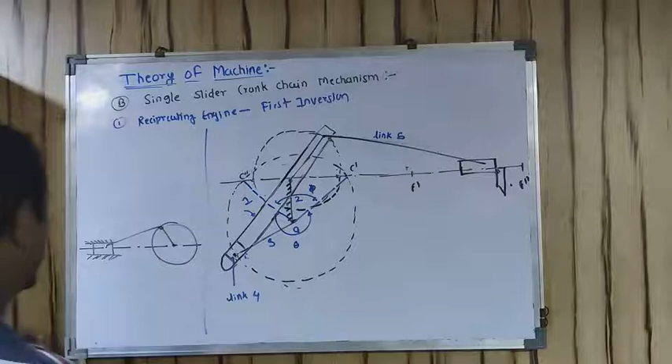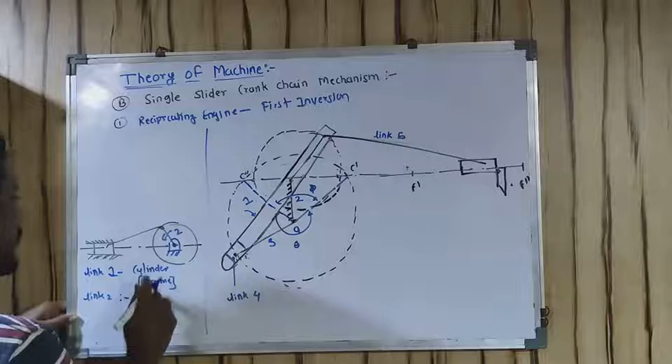Link number 1 is a cylinder, I think so, which acts as a frame. The fixed link is called the frame. Link number 2 is this crank, and I can see it rotating like this - the driving crank. Link number 3 is my connecting rod.

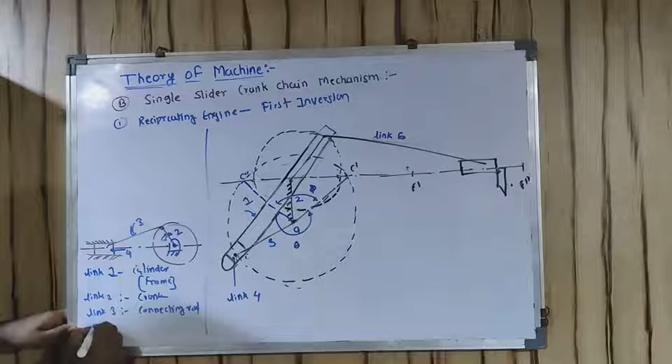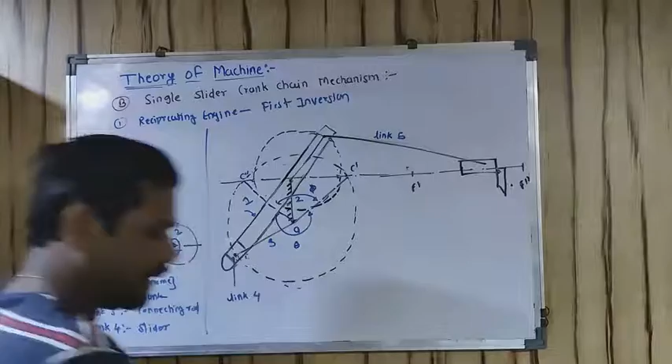Link number 4 is my slider which slides inside the cylinder. So what happens is, to convert rotary motion into reciprocating motion, the mechanism I use is the reciprocating engine mechanism, which is nothing but the first inversion of the single slider crank chain mechanism.

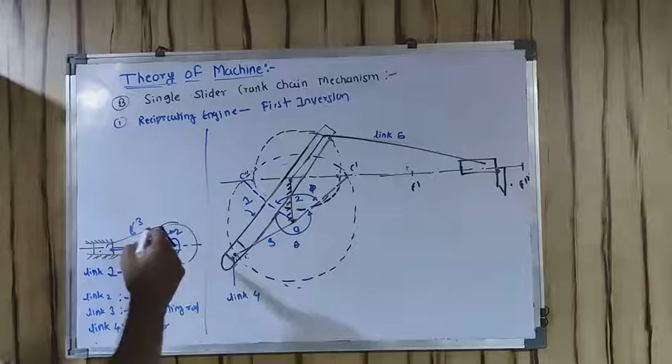As you can see, there is one slider, that's why we call it the single slider crank chain mechanism. So this is the slider, this is the crank. There will definitely be one slider and one crank in every mechanism of single slider crank chain mechanisms.

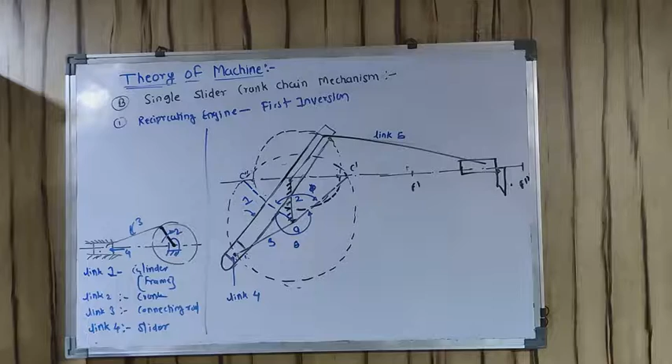So what is the working? Link number 1, which is first of all the reciprocating engine, is an inversion of single slider crank chain mechanism. It consists of 4 links, therefore it is also called a simple mechanism. Link number 1, which is the cylinder, is a fixed link which acts as a frame.

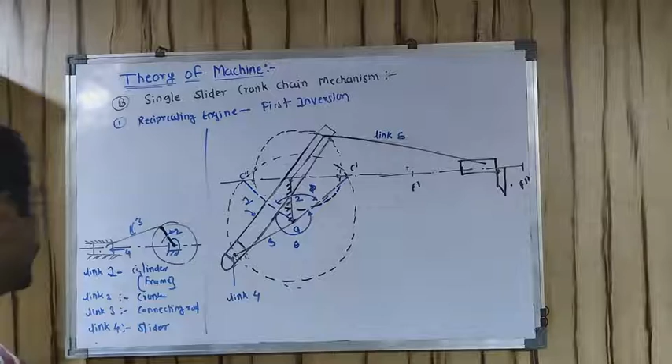Link number 2 is the driving crank which is a rotary link. Link number 3 is the connecting rod which is an oscillating link, and link number 4 is the slider which slides inside the fixed cylinder. So it has 3 turning pairs and 1 sliding pair in this mechanism.

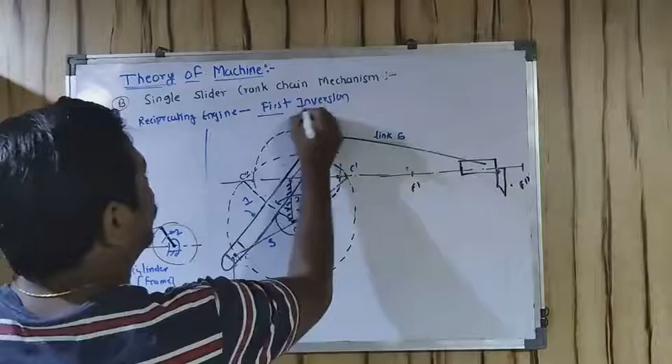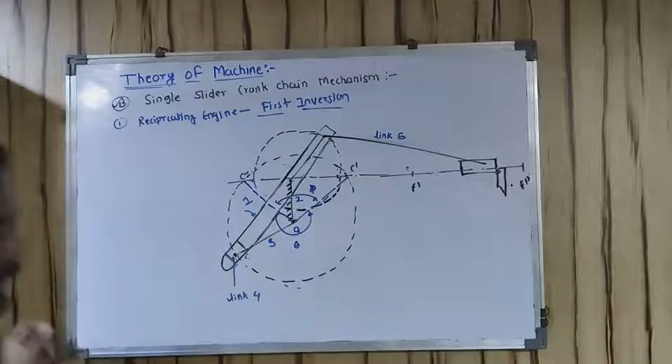So this is called the first inversion of a single slider crank chain mechanism. Then we have second inversions also. In second inversion, we have two types, one of which is called the gnome engine.

And then the Whitworth quick return mechanism. This Whitworth quick return mechanism is one of the main and important topics from our engineering syllabus. This is the Whitworth quick return mechanism - this is the RAM and this is the tool arrangement.

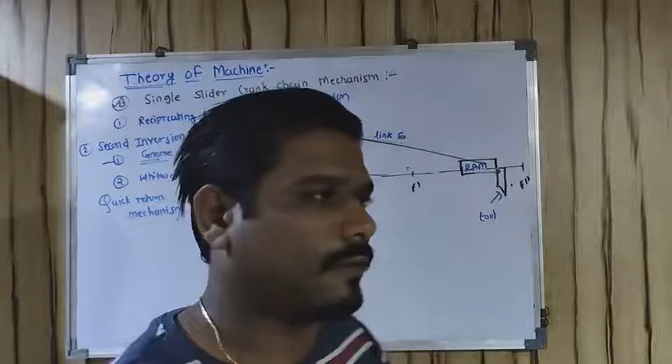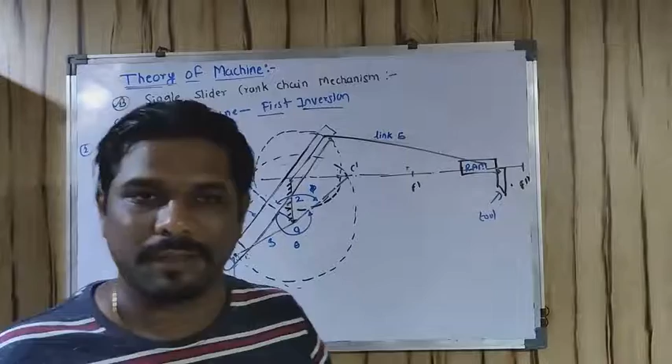Now for this gnome engine, I can draw the diagram and explain it, but instead I'm going to give you an animated video of the gnome engine, and I'll post the explanation of that on your WhatsApp group.

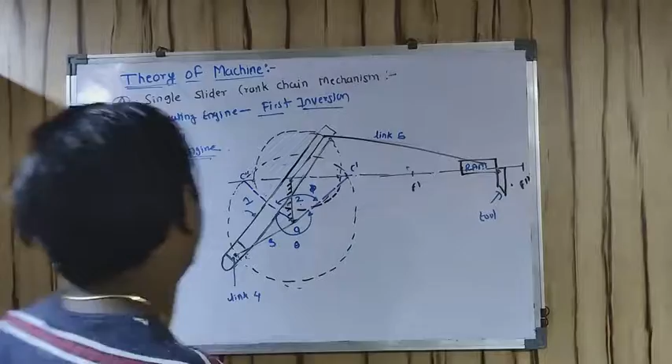The gnome engine is not as important as compared to the Whitworth quick return mechanism, but both of them belong to the second inversion. Now why do we call these 2 mechanisms the second inversion? Because in both mechanisms, link number 2 is the fixed link, and when link number 2 is fixed, it is called the second inversion.

Okay guys, so here link number 1 is a slotted link, this is called a slotted link. Now about this link, there is some scale type arrangement, inside which we have a slider or a slotter. This is my slider, as you can see over here - this is my slider or slotter, which is link number 4.

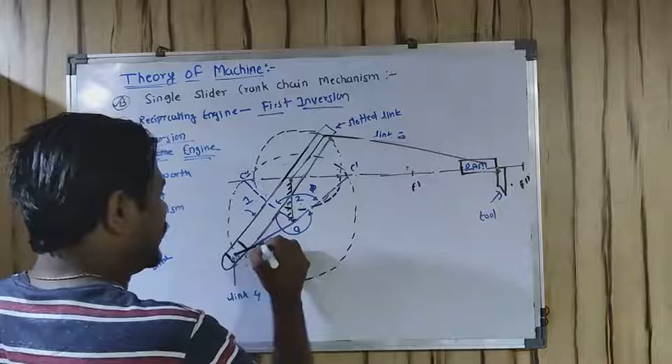Link number 1 is a slotted link. This is my link number 1. Link number 2 is this fixed crank. Link number 3 is this connecting rod. As you can see, this is my third link - link number 3 is this connecting rod.

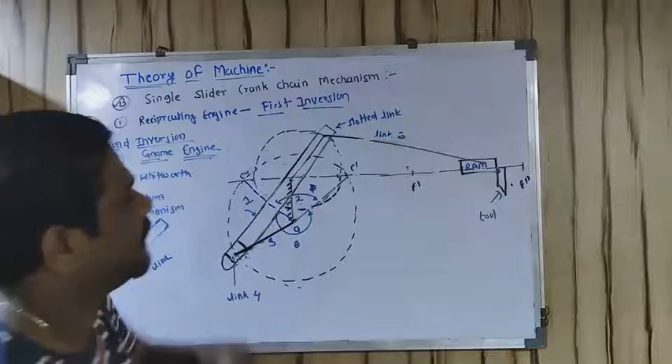Link number 4 is this slider. And this is link number 5, also a connecting rod or coupling rod - you can call it either - which connects to the ram and tool arrangement. This Whitworth quick return mechanism is normally used in case of... this is my link number 5.

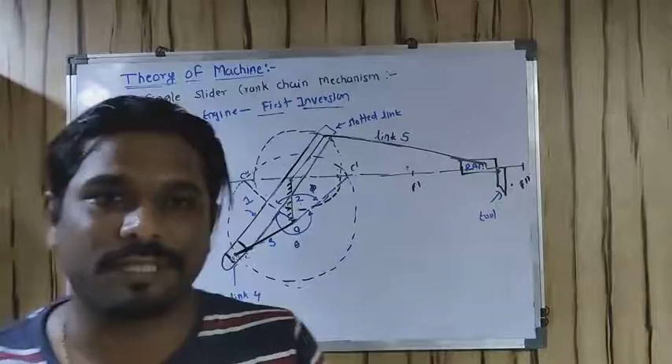This Whitworth quick return mechanism is used in case of a shaper machine for shaping operation. So in this Whitworth quick return mechanism, the basic thing - it is a simple concept. What is happening over here?

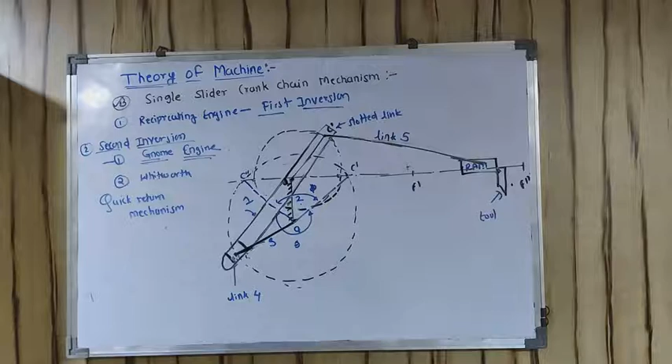When this driving crank is moved from AC dash to AC double dash, at an angle of theta, we have the cutting stroke.

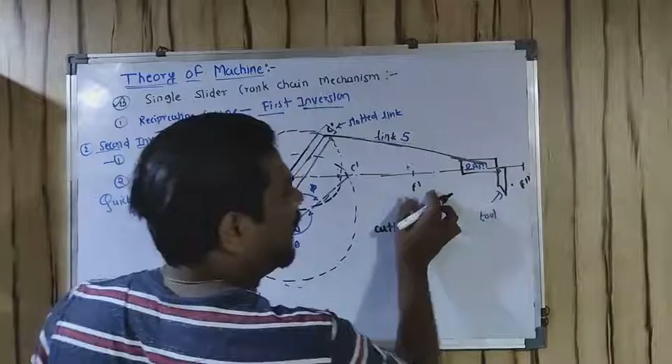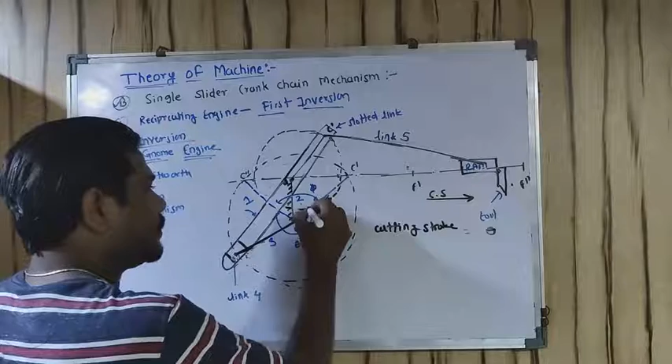At that time, this ram will move from F dash to F double dash for cutting stroke, CS stands for cutting stroke, having an angle of theta in clockwise direction, as you can see over here, at an angle of theta.

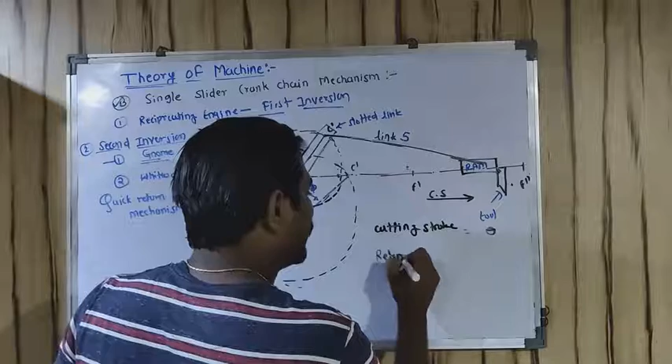And same when this driving crank rotates from AC double dash to AC dash, we have our return stroke at an angle of phi, from AC double dash to AC dash, as you can see over here.

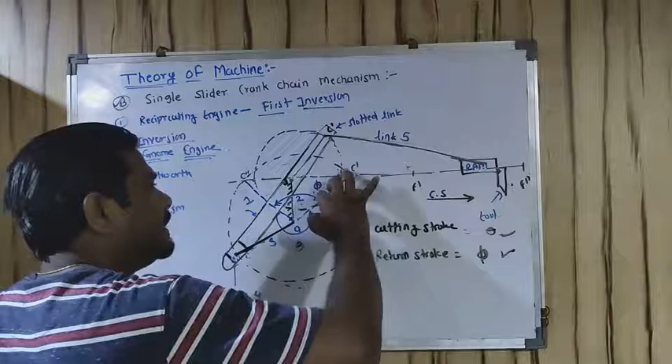So during cutting stroke, angle is theta. During return stroke, angle is phi. So during cutting stroke it is traveling from AC dash to AC double dash.

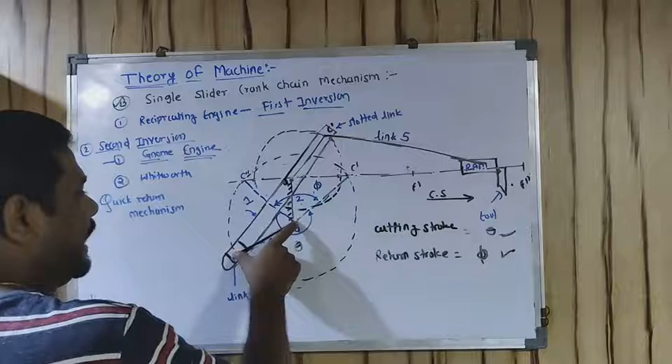At that time this slider will move from here to here. This AC dash, look at here. This is my point C. This point AC will come over here, which is nothing but AC double dash, to AC dash.

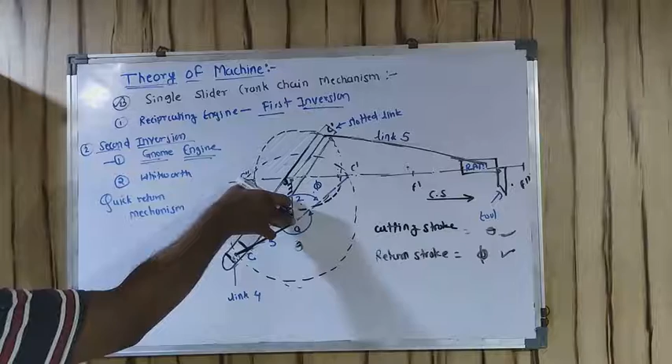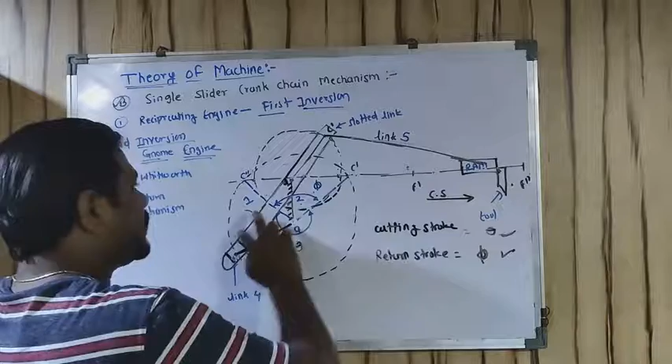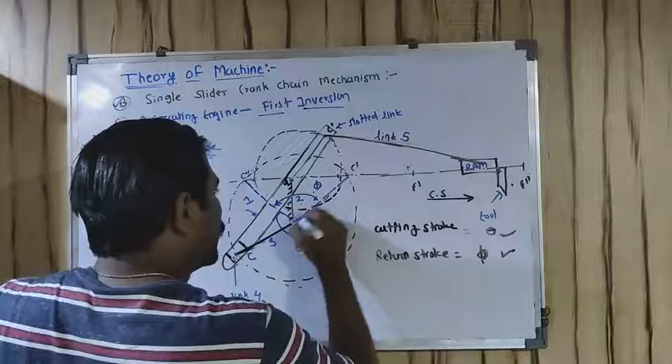Now this slider will reciprocate inside its slotted arrangement. Then the slider will reach some point, and when this AC dash moves from AC dash to AC double dash, it is traveling more distance, meaning it's taking more time for cutting stroke.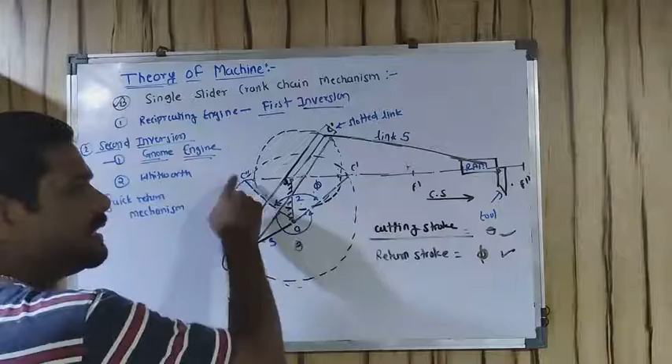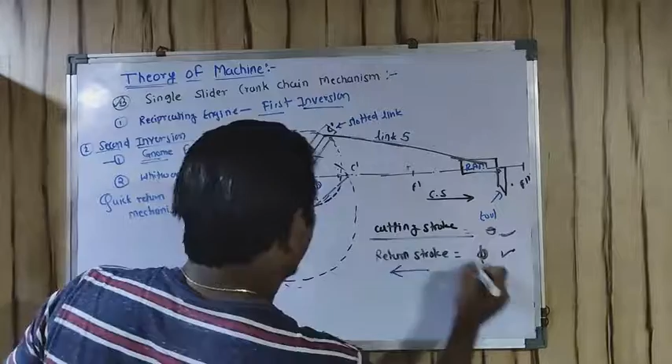When it moved from AC dash to AC double dash, that is cutting stroke. Then when this crank moves from AC double dash to AC dash, in this manner, we have return stroke with an angle of phi as shown.

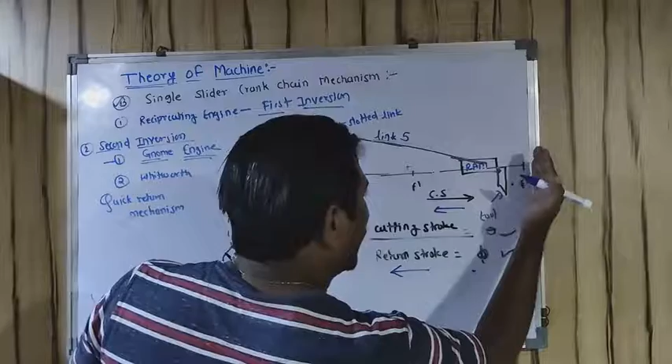So time for the return stroke means the ram will move from F double dash to F dash. This is RS. RS stands for return stroke, guys.

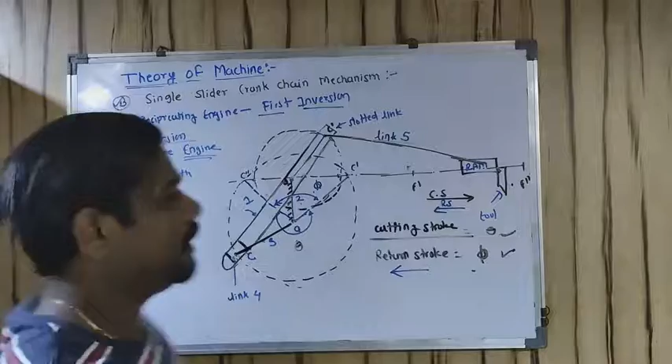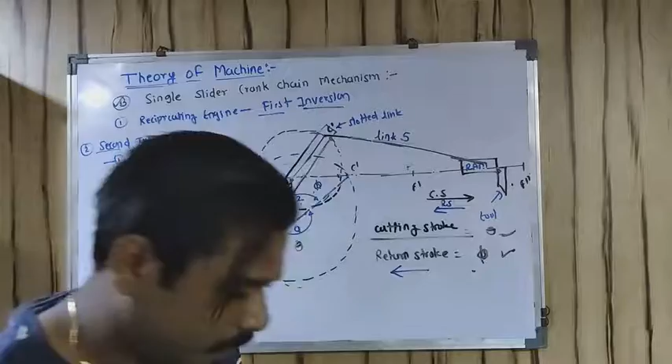Now, time for cutting stroke compared to time for return stroke: the time for return stroke is very less as compared to the time for cutting stroke. It must be very less because the return stroke is idle time, and during that time no material is being cut.

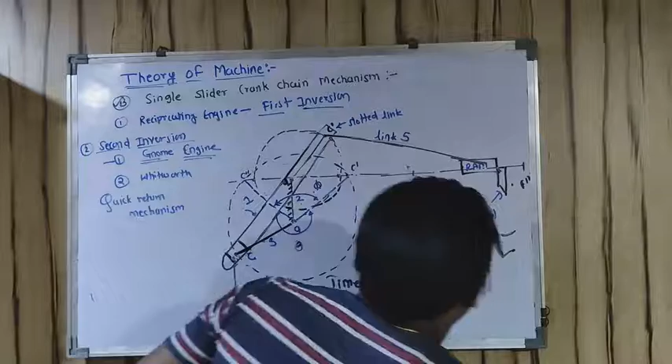So the time for cutting stroke to the time for return stroke is the ratio we need.

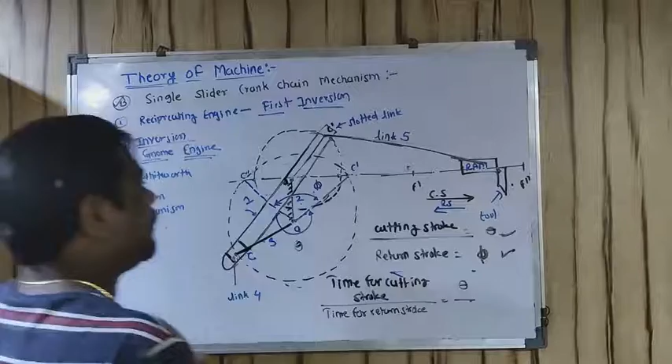Time for cutting stroke means that angle, AC dash to AC double dash, is theta, and time for return stroke is angle phi. Phi is equal to 360 minus theta, instead of phi you can write 360 minus theta, and this is nothing but Whitworth quick return mechanism.

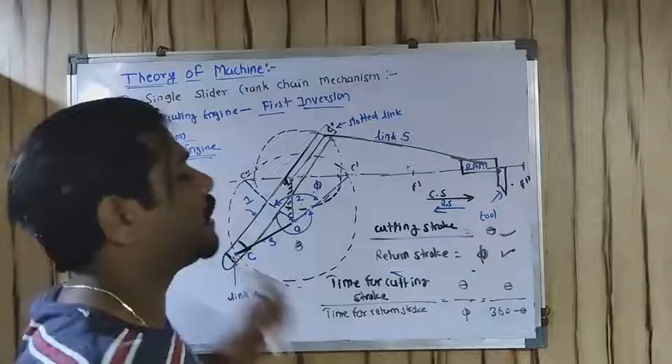How are you going to write this, the way I drew this diagram? First you have to write this as quick return mechanism. It is an inversion of the single slider crank chain mechanism. After this, it consists of 5 links with the ram and tool arrangement.

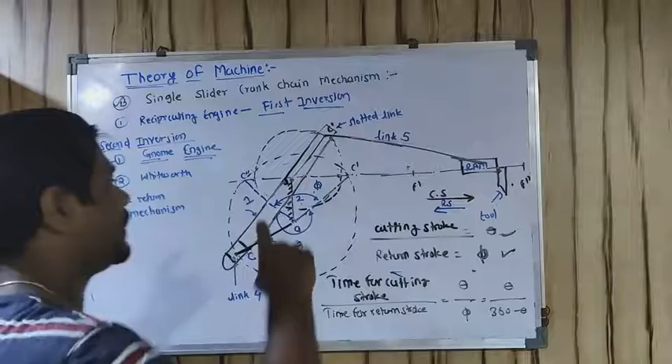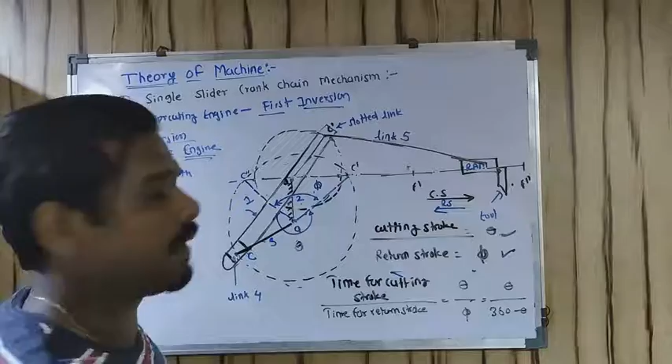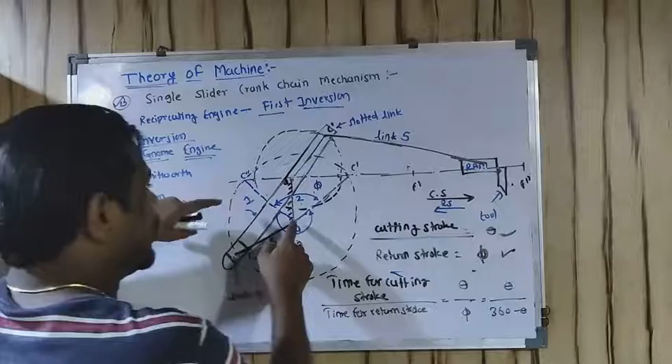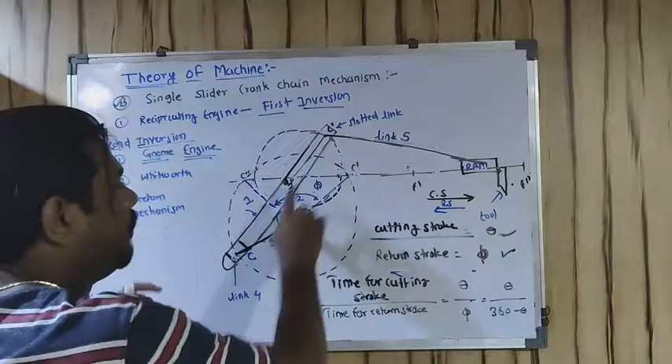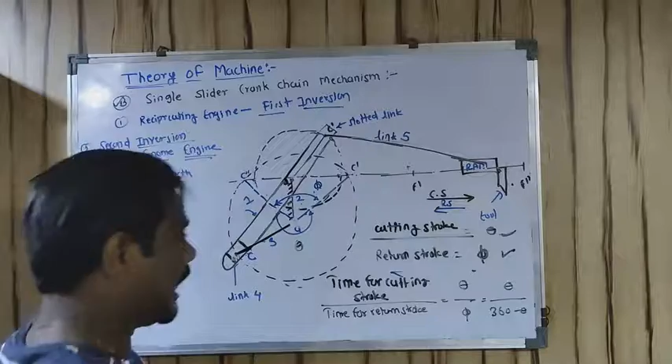As I discussed, when we directly move this AC crank, when this AC rod moves from AC double dash to AC dash, at an angle of phi, we have our return stroke. When this moves from AC dash to AC double dash, covering an angle of theta in a clockwise manner, we have our cutting stroke. The time required for cutting stroke to the time required for the return stroke is theta by phi, and theta by phi you can write as 360 minus theta.

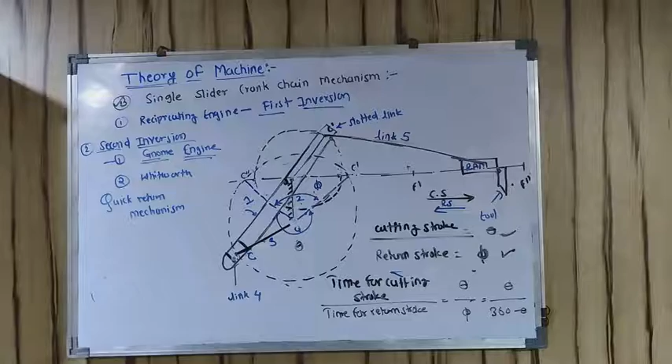This is your quick return mechanism, guys. The same type of mechanism is used in case of a crank and slotted lever mechanism, but crank and slotted lever mechanism is my third inversion.

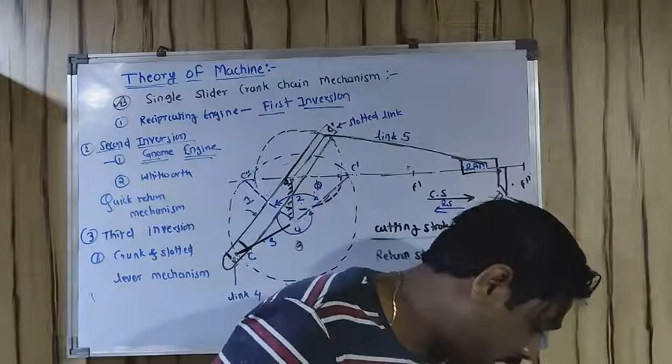In third inversion, we have crank and slotted lever mechanism. With the crank and slotted lever mechanism, oscillating cylinder engine and pendulum, oscillating cylinder engine and crank and slotted lever mechanism are from the third inversion, and the fourth inversion is hand pump for the single slider crank chain mechanism.

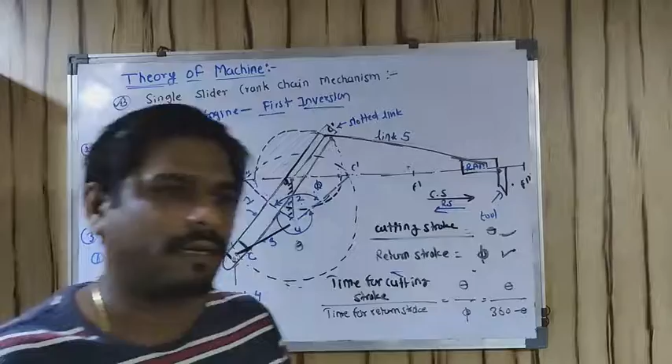Now, if you understand this quick return mechanism, it is very easy to understand crank and slotted lever mechanism. That's why crank and slotted lever mechanism, hand pump and oscillating cylinder engine, these are very simple mechanisms that I'm going to explain from the notes only.

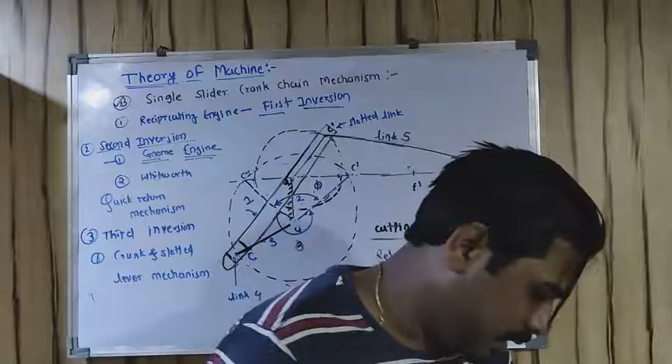And after this, in the second part of this single slider crank chain mechanism video lecture, we are going to complete double slider crank chain mechanism and its inversions, which are simpler than this one.